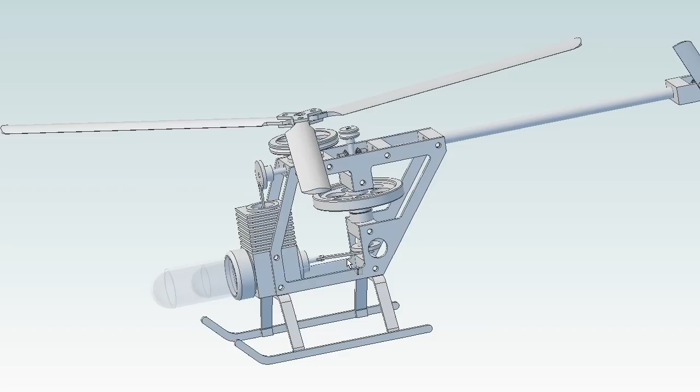All right, now that the cylinder block is completed, there are a number of elements that need to be connected to it. So let me just hide some of these parts so we can get a better look.

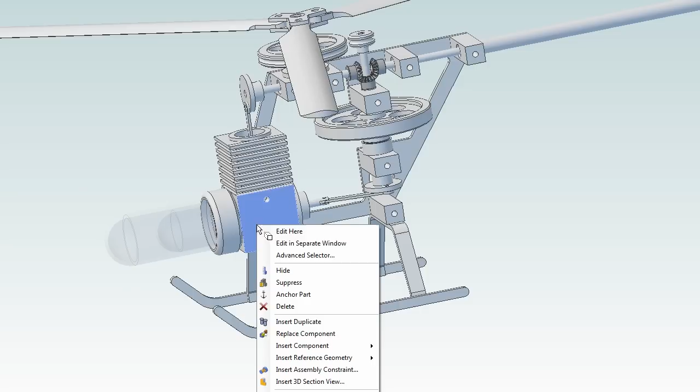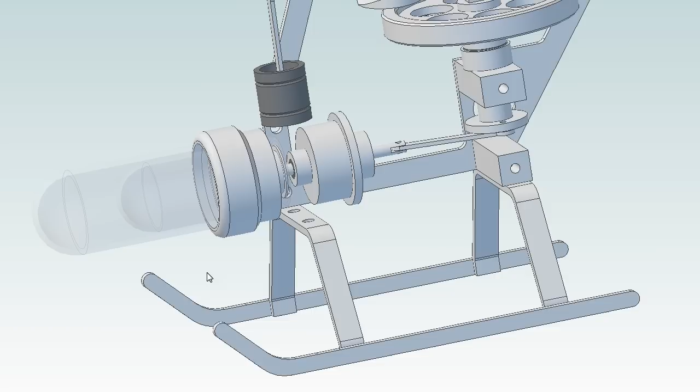Okay. First off, the original plans called for this Pyrex displacement cylinder to be simply glued into the cylinder block, which I'm sure would work just fine, but my concern is that it's glass. If it breaks, how do I get it out, remove the glue, put another one in? And also, if I ever have to get in here to make any adjustments, I would prefer a mechanism that allows me to make a tight seal and yet be able to remove this glass cylinder and replace it. So what I came up with was this, what I call a cylinder adapter.

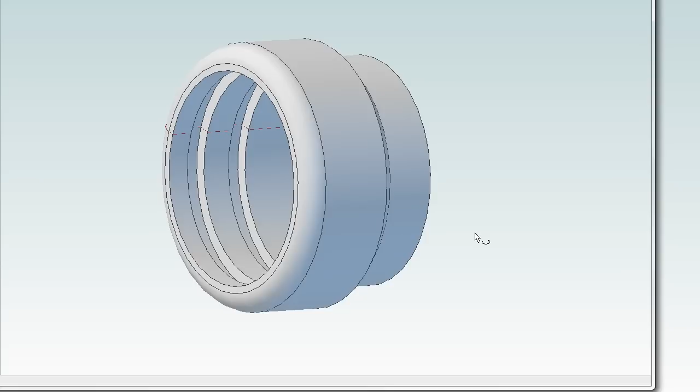This is a close-up view of it. This part will fit right into the cylinder block where the original plans would have had the glass tube going directly in. I've milled this and the hole in the cylinder block larger so the cylinder itself can fit inside here. But then what I've done

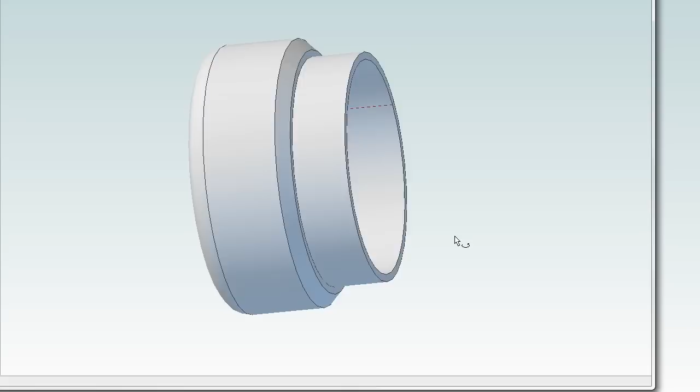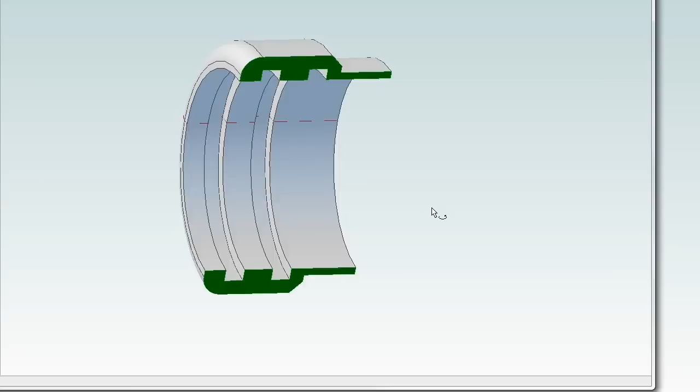is I'm going to machine out two inner grooves in here and fit them with O-rings so that we can just do a nice snug force fit of the cylinder in here. It ought to be airtight. And it allows me to remove it just in case I ever need to. So let's go build that part.

All right, I'm working on the cylinder adapter now that's going to have the internal O-rings to hold the glass cylinder. This piece is much longer than the actual piece that we need, but because the jaw needs a way to hold on to the piece, and I have to machine it from both sides, I had to leave extra stock on each side.

One reason is that one of these sides is going to be finished and visible on the part, and when I flip that over, the jaws will mar the finish. So I have to leave extra on both sides, and then we're going to have to cut off what we don't need. It's frustrating, but it's just part of the process until they invent a force field or something to just hold the piece in the air.

So anyway, the first thing I want to do is find Z0, which is the face of the stock. By the way, I have faced both ends of this piece prior to getting started here. So what I'm going to do now is just jog in. I'm just moving in a thousandth at a time, because I just want to kiss the stock. And that's it. So I now set my DRO, and I know that is Z0.

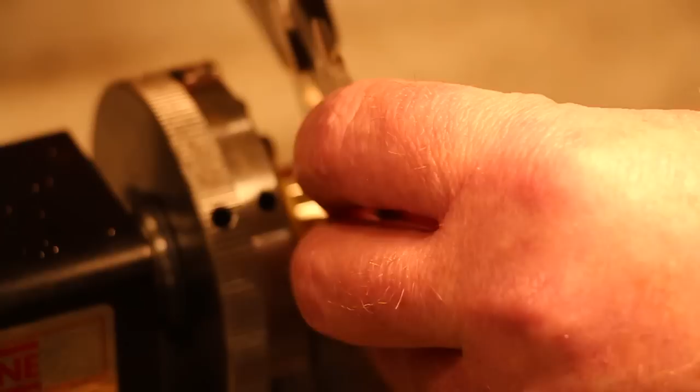So now what I'm going to do is modify that wizard. Normally, had that not matched, I would have advanced the tool to 1.1, where it left off, and then corrected the DRO to the true measurement that I took, but since it's essentially the same measurement, again, this is decorative, a thousandth isn't going to matter, plus we have to sand it anyway.

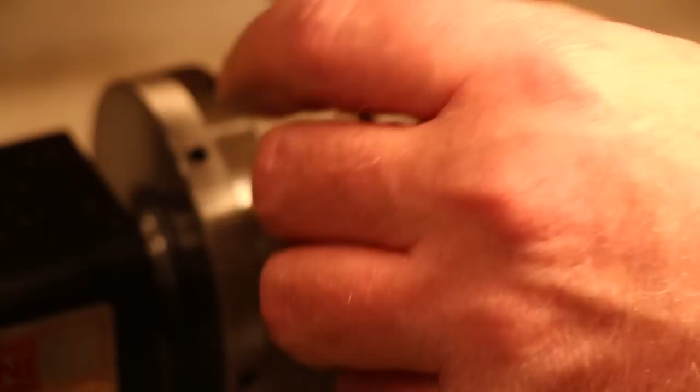All right. Okay, that's actually right on. So now I'm going to flip the part around in the chuck and machine the other side of the piece to its dimension.

All right, I flipped the part around. I found Z and X the same way I did a moment ago by touching off on here, and now I've got a little program set up to machine the first ½ inch of this down to 0.95. This is the end that's going to be pressed into the cylinder block. So this dimension does have to be right.

So the final dimension is 0.925. I'm going down to just 0.95 now, so I can recheck where I am when I get there, and then make any adjustments that are necessary.

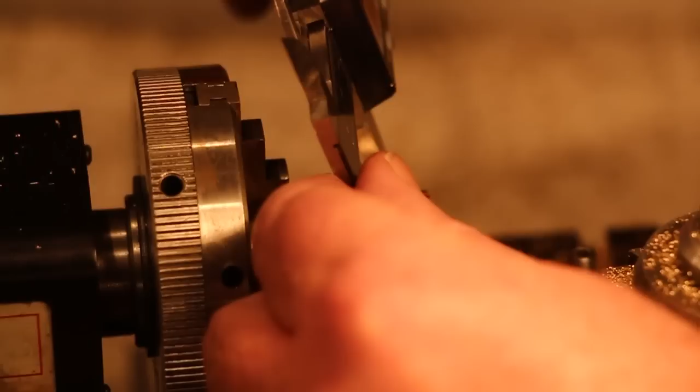That's dead on. So the real proof would be to take the actual cylinder block that we're going to force that into. And yeah, there's about half a thousandth or so of play, which is fine because I'm going to Loctite that in. Now, obviously, this is longer than it needs to be because we want to come flush up to here.

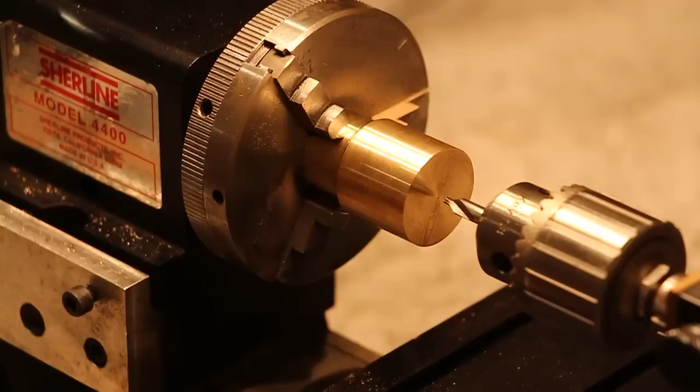We have to now drill and then bore this part out so that it can fit what will ultimately become the main cylinder after we cut this down to size. So it's quite a bit of drilling and boring we're going to have to do here. I can drill up to about 3/8 of an inch, and then the rest of it we'll switch over to the boring bar and we'll do that. Not much to it.

What I measured here is that this entire piece is 1.5 inches, and I'm only going to go down 1.35 into here because, like I said, we do not want to be boring into the chuck. Sort of have to peck drill just like we would on the mill.

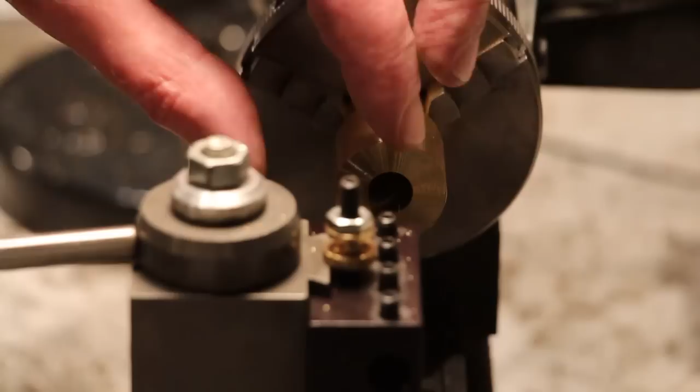I've drilled the starting hole out to 3/8 of an inch, which, like I said, is the largest drill bit I can use on the lathe. And now I've put my boring bar onto my quick change tool post, I've ensured that the cutting edge is dead on the center line. And I've made some trial cuts and gotten an approximate dimension of how large the hole is.

We have quite a ways to go, because right now we're at roughly 0.4, and we've got to go out to 0.866, which is considerably larger. And in fact, the hole has to be big enough to fit this glass tube, which is going to be the main cylinder.

So anyway, using the wizards in Mach 3, I've set up a boring routine to start to enlarge this hole. I'm going to go out to 0.8, which is 66 thousandths less than the final size. So once we get out there, we can do some very accurate measuring and then sneak up on the final. But you'll see quite quickly that this boring operation is a whole lot different than what we did on the milling machine, because it can be controlled.

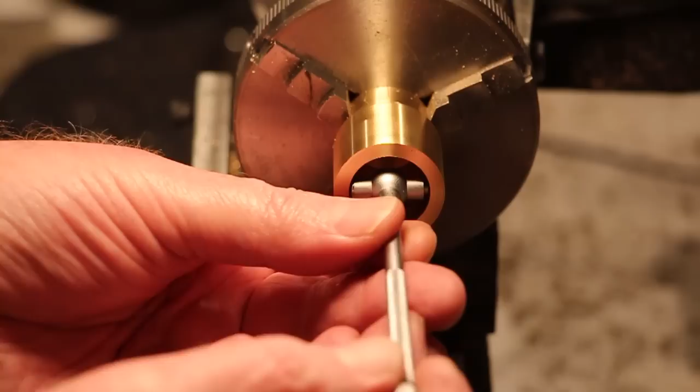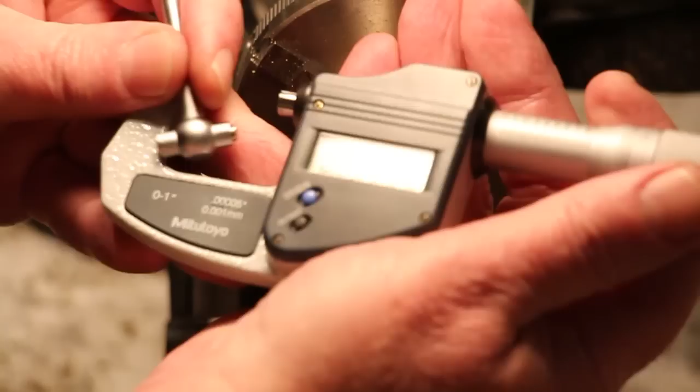Alright, well, I finished the boring operation out to a diameter that the machine thinks is 0.8. I'm going to see what it really is. Of course, that was just an approximation, because I didn't have a good starting point. But now, right, now it would appear that the actual diameter is 0.789.

So now I'm going to bring the X slide in to where we left off. That's where the machine thinks 0.8 is, which is what we think we just did this to. But what we're measuring in practice is 0.789.

So what I'll do is adjust the DRO to match what we really read, 0.789. I know you can't see that I'm doing that, but that's what I just did. And now I'll go in and modify the G code.

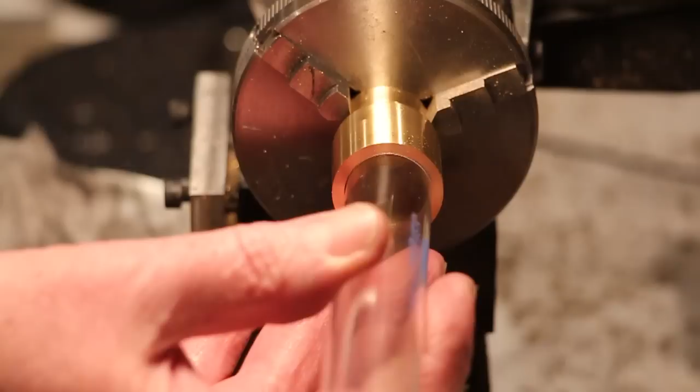Let's do the first sanity check. Yes, the hole is still too small, but we're very, very close. So, measure it again.

Well, it turns out today's lesson, boys and girls, is don't buy cheap tools. This was a really cheap set of boring bars, and that seems to be what the problem is. I switched through a couple of them, and I finally found one that's actually cutting.

Anyway, I just took a measurement here, and we are now 15 thousandths shy of the diameter we want to be at. So I'm just going to use MDI commands now and sneak up on that. I'll make a few cuts and measure again, until we get to the diameter we want to be at.

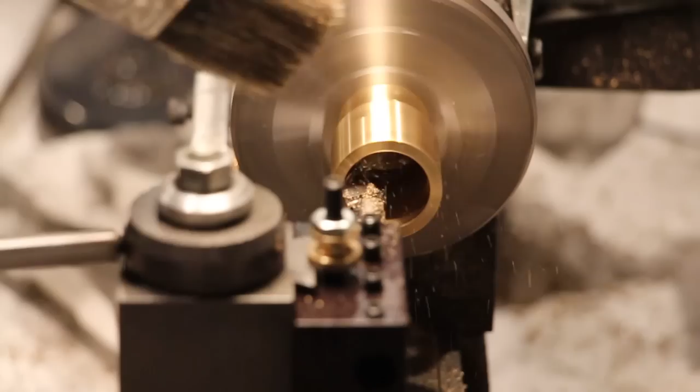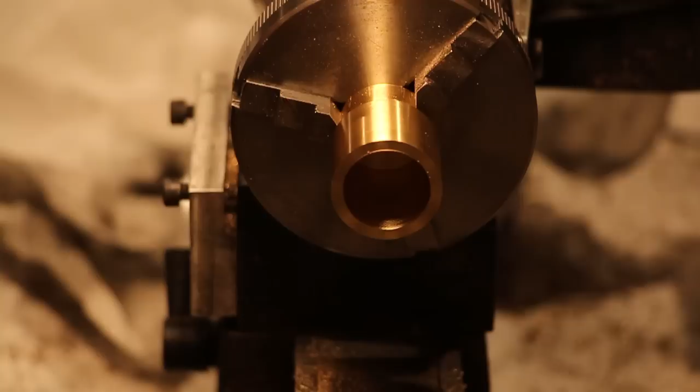Alright, magic. That's just fitting in there exactly the way I want it to. So, a little bit of blind luck.

There's still some chatter in there. I am definitely going to buy some new cutting tools before we do the next boring operation in this project. But for now, that is the right size, and the chatter won't matter at all for what we're about to do next. Because what we're going to do next is cut some inner grooves to put some O-rings in to hold that test tube in there nice and tightly.

Last night there were a number of issues with the boring setup that were making me crazy, so I did a bunch of research, and the tools I was using were an extremely cheap set, and in fact an entire set of 9 tools costs what one good tool would have cost. So it was a cheap import, and I know that that was part of the problem.

But apparently another part of the problem was your setup has to be incredibly rigid when you're doing boring. So I'll have to work more on that in the future, the next time we do some boring.

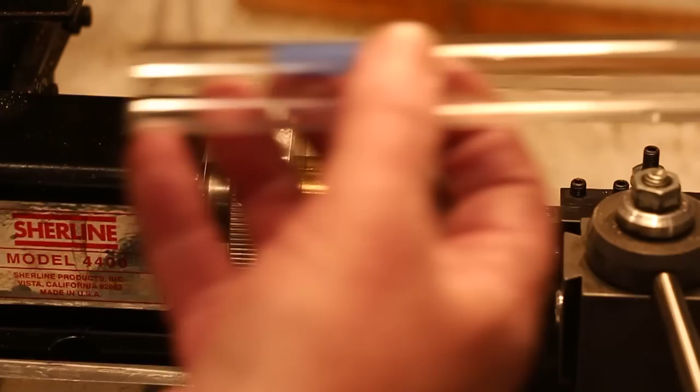But now what we're going to do is cut a groove for some O-rings that will sit inside this adapter, so that when we press the test tube, which is the cylinder, in there, the O-rings will give it a nice tight seal. At least that's the plan.

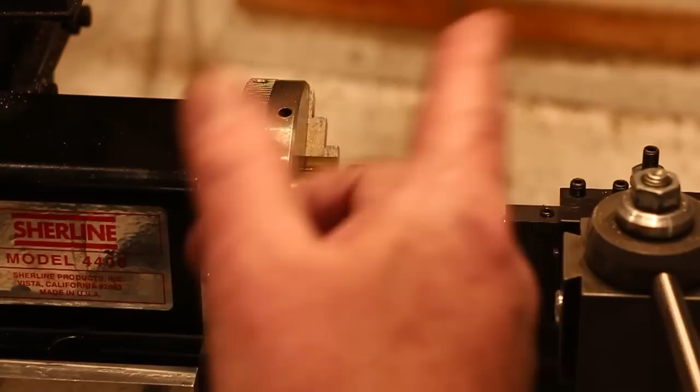So first off, this bit, there's a company called Thinbit. You can find them at thinbit.com. I've heard a lot about them from other machinists. They specialize in small bits, which is why they're called Thinbit. And they can pretty much make anything. They have a very wide selection of the kind of bits you're not going to find in other places.

This one in particular is 80 thousandths, which is one of their stock bits, and it's the one I need for the size O-ring I'm using. But if I needed this to be 79 thousandths, I could have ordered one and they would have made it for me. Needless to say, they're not cheap, but from what I've heard, they're well worth the price.

So step one here, first of all, if you recall, this is a lot longer than it will be in the final, when we're finished with it. In fact, it only has to be about out to here. So I left plenty of space here, and there were a number of reasons for that, but one of them is it's going to allow me to test making some O-ring grooves in here. And then, we can just part that off and then make the real ones based on what we learned. So that's the plan.

What I'm going to do first is figure out how far we have to bring this so it's just touching. Now what I'm going to do is disconnect the servo on the cross slide, because this is the kind of operation I just want to do with the hand wheels.

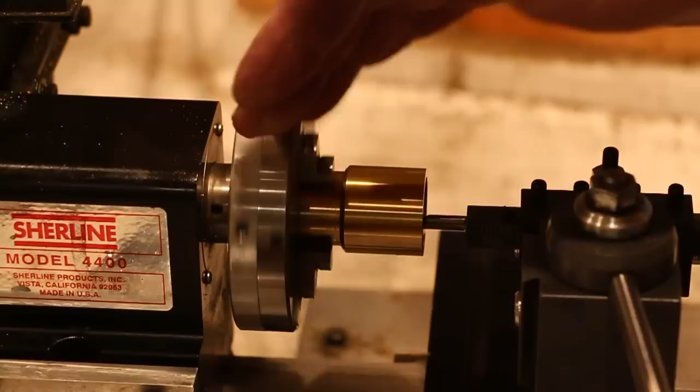Again, I've never done this, but my guess is because this tool is shaped very much like a cutoff blade, that you want to use a relatively low RPM like you would if you were doing a cutoff operation.

What I'm going to do is bring the bit in until it just touches. I'm turning the hand wheel here very slowly, just listening for it to touch. Okay, it just touched. So now what I'm going to do is zero the dial on the hand wheel.

Now I'm going to put lots of cutting fluid in here, again as though I were doing a cutoff operation. Now the plans call for the groove to be 50 thousandths deep, which is one full turn of the hand wheel. So I'm going to go nice and slow, listening and watching.

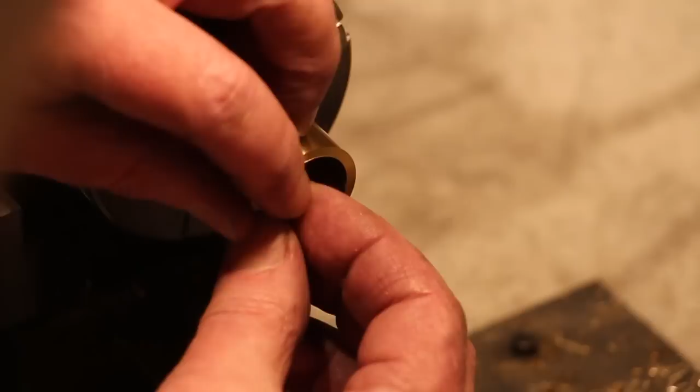So now I have this O-ring. It's 21.5 millimeters inside diameter, which is just a hair smaller than the test tube's OD. Now, I guess in theory, this should somehow snap in here. It's in there now. Let's see how that feels.

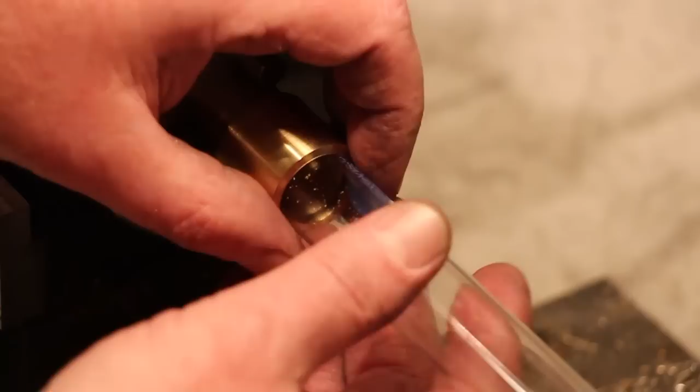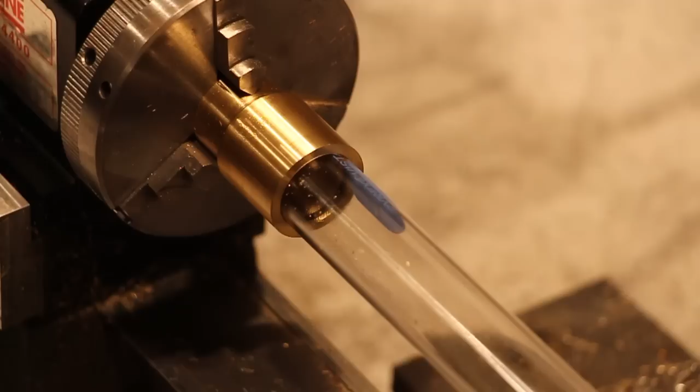Sweet. All right, that's perfect. I know you can't tell, but it is an incredibly tight fit. This isn't going anywhere, and I'm sure there's no oil leak, air leak. So my plan is actually to put 2 O-rings in here, just to be absolutely sure that there is no air leak. But now I know that that was the proper depth for this to work. So I'm glad we did that.

All right. I guess what I'm going to do now is flip the part around, get the final depth on this side.

All right, I also bought a new parting tool setup from Thinbit. It's a little big for this lathe, but it should work just fine. When I'm setting it up, it is critical that the blade be exactly straight with the stock. So what I do, I know this is a nice faced-off end here, so I've just brought the tool right up against it, and now I'll just tighten down the tool post so we're square there.

Alright, let's give this a try. Same as before. Nice slow speed. Lots of fluid. And I'm just going to turn by hand using the hand wheel. Nice. I can tell you already that I really prefer this cut-off tool to what I've been using. First of all, the tools you get from Thinbit are incredibly sharp. You know that the first time they touch metal.

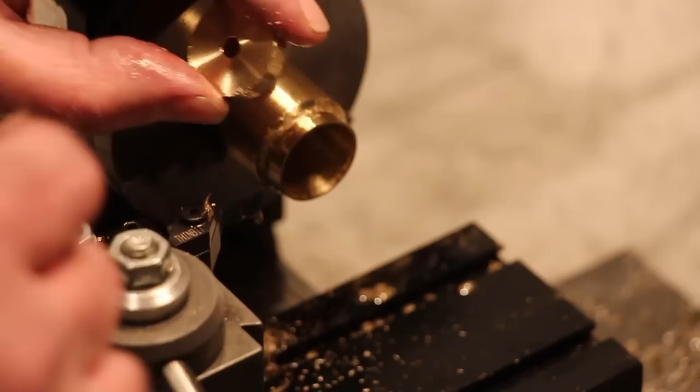The second thing is, it's always annoyed me that when I do a cut-off with a standard cut-off blade, which are ground flat this way, you always have a nub left on the part that comes off. This one is ground at a bit of an angle this way, so that it's cutting the drop-off part first, so nothing is left behind here, and then you advance the tool in a little bit more, and you get that same nice clean cut on the other side. So this was well worth the investment. I have always stressed over doing cut-offs because I just never felt that I had any control. This feels really nice.

All right, so next I'm going to measure this again and face it so that it sits flush. I can see that there's very little I have to remove, but I want it to sit flush with this edge here. All right, the adapter has now been cut to its final dimensions. I used the parting tool and I cut off the remaining stock that was here.